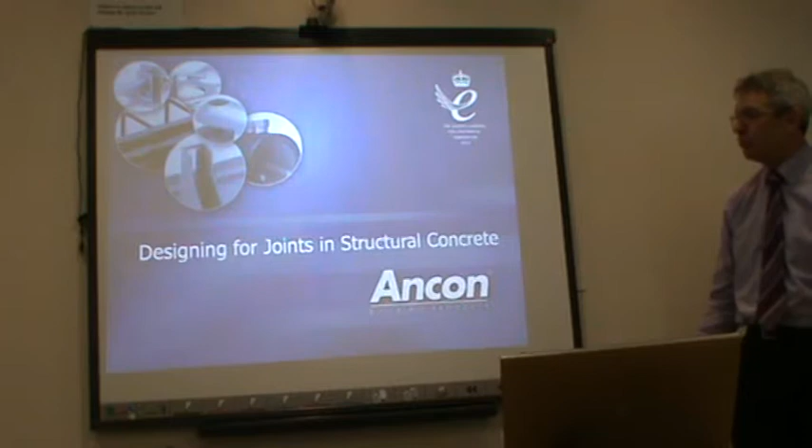We're going to look at reinforcement continuity systems, starter bar systems and bar couplers, shear transfer mechanisms - basically dowels and shear transfer mechanisms, thermally broken connections and shock connectors, that sort of thing, and punching shear reinforcement. Those are the 4 areas we're going to look at. It's not all focused on the products.

Let's start with bog standard construction joints, because we do this in different types of joints. Construction joints - everybody's poured enough concrete for the day, they've gone home, they're going to come back the next day and pour more. What you usually do if you're casting a slab or a column vertically, you leave some bars sticking out the top of the concrete, come back the next day, overlap some more bars, and pour more concrete.

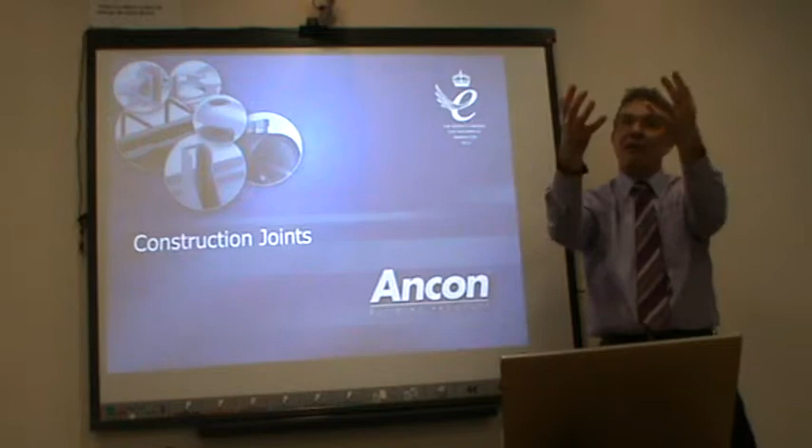If you're fixing walls to slabs, or walls to walls, you can't have bars sticking out into fresh air. What you've got to do is drill loads of holes in the formwork, have bars sticking out, then thread all the formwork off the bars - and the bars always stick out into places where people want to be working.

So other systems have been developed so you don't have projecting bars from walls. The most common system used is a continuity strip. Ours is called Eazistrip, with a Z in it. Everybody does continuity strips - Halfen do one called Kwikastrip, with a K and a W at the beginning. It's not top end of the market, just cheap and cheerful stuff.

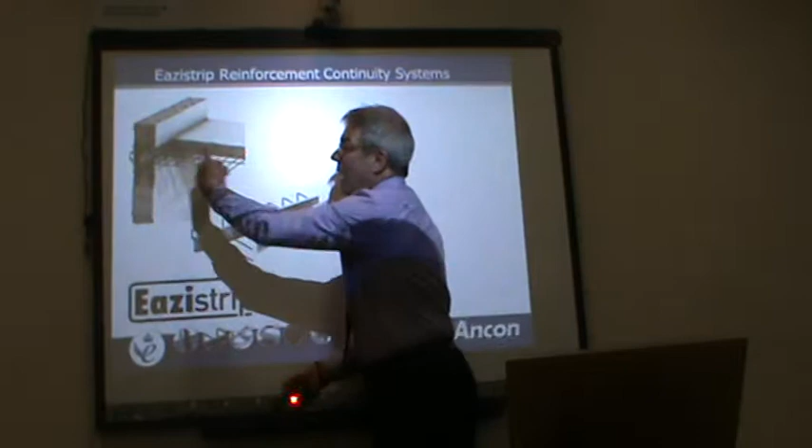An Eazistrip system is starter bars in a box. Rather than having bars projecting out through the formwork, you have a box with a lid on it. You fix that back to the structure, nail it to the structure, cast your concrete, take the lid off the box and bend the bars out as and when you need them.

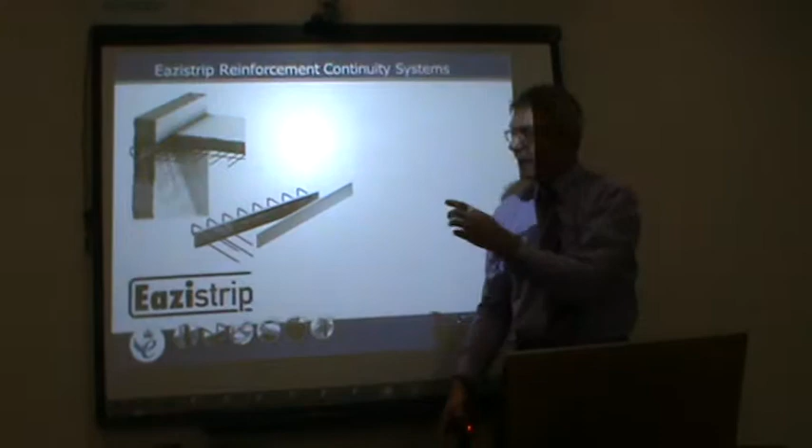This has got CARES approval and BBA certification, and it works great for small diameter bars. When bars are 10 and 12 millimetres thick, they're easy to bend into the box and easy to bend back out. We use special reinforcing bar so you don't get any loss of ductility or brittle failure in the bars when you bend them twice.

It's fine for small bars, but big bars you can't bend - you can't fit any in the box because the lap length required when you bend the bars out is too great. And even if you could, you couldn't physically bend them. A 20mm bar, you'd need lots of big blokes with big scaffold poles and big muscles, and everybody's going to give themselves a hernia bending pieces of reinforcing bar.

So for larger diameter bars, other systems are used. That's how the Eazistrip works.

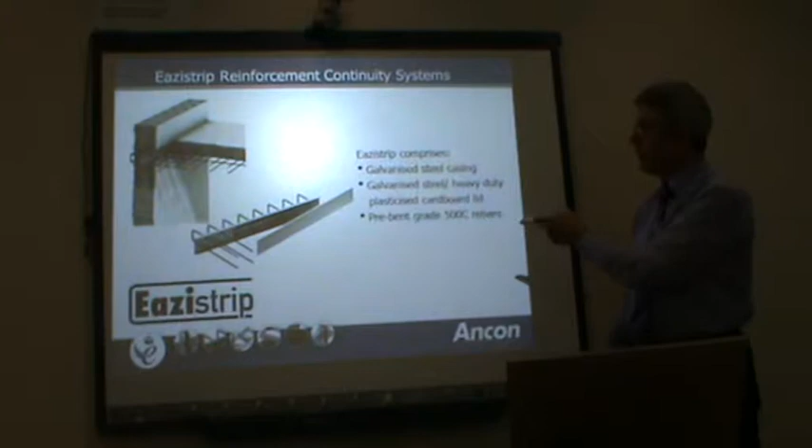What we use for larger diameter bars are either starter bar systems or our KSN anchor system. They're both basically a means of anchoring a casting socket into concrete. Rather than having bars that you bend out, you thread a bar into a casting socket. A starter bar system is basically a reinforcing bar coupler with a bar screwed into the back of it, cast into one concrete element.

The nailing plate is just to fix the coupler to the shuttering. You strike the formwork once the concrete has cured, and simply screw in another bar from that point onwards and take it away from there.

That's fine, except that in a wall - if you're fixing a slab to a wall as I showed in the last slide, and it's only say 200mm of concrete - by the time you get a coupler in, and the bar is providing the anchorage for the coupler, the bar has to come out straight for 4 diameters, then bend down. Unless the wall is quite thick, you'll end up with a bar that's either too close to the face of the concrete, or even sticking out the back of the wall.

Even better than that type of system, which is available for all bar diameters, is our KSN anchor system, where rather than having a casting socket like that, we have a casting socket that looks like this. The anchorage is achieved by the flattened end on the forged stud, which anchors it into the concrete to resist pull-out.

The bars are simply screwed into that, and these are installed on a timber carrier. You push a piece of timber, nail it to the formwork with these attached. After the concrete's been struck, you take out the timber and screw the bars into the casting sockets at the bottom of the recess.

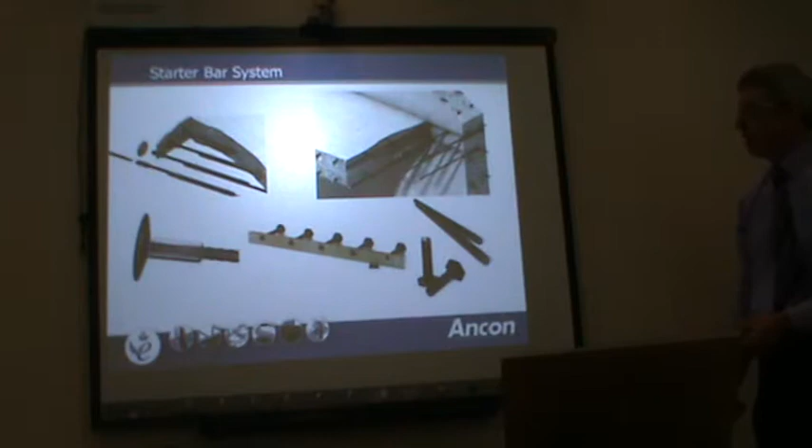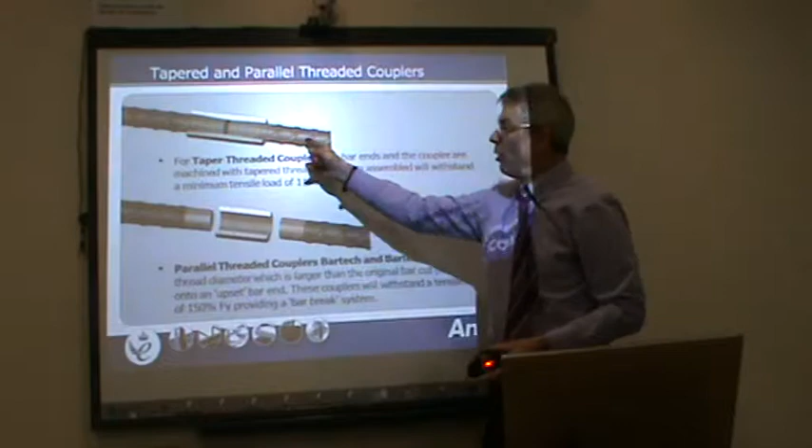Couplers, they're both sort of couplers of a kind, I suppose, and the starter bar system uses the conventional taper-threaded coupler. Taper-threaded couplers are the industry standard, a means of connecting two reinforcing bars together without having to overlap them. The starter bar system is one use, where you thread one bar into the coupler at a concrete joint, and another bar at the other side.

Taper-threaded couplers are the cheapest couplers that we manufacture, the cheapest available really. They have advantages over parallel threaded couplers in that, because the thread gets smaller as it goes in, when you're pushing the bars in and winding them with a torque wrench, you're effectively pushing the bar into a space too small for it. What happens is this coupler ends up clamping the bar. So not only do you get the full pull-out strength required, but you can also achieve the slip resistance.

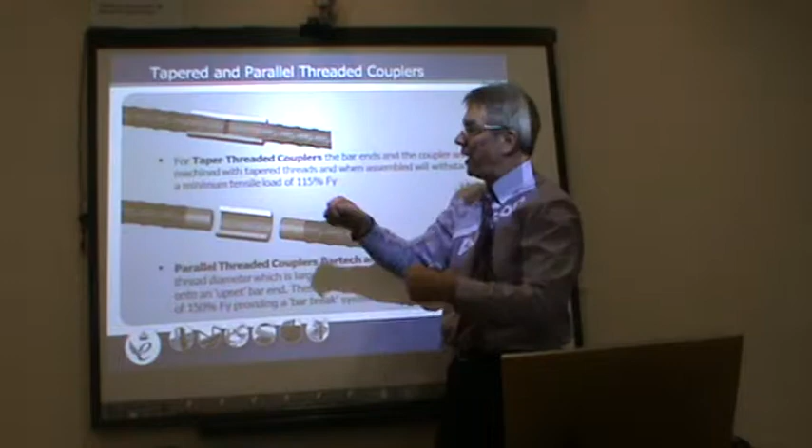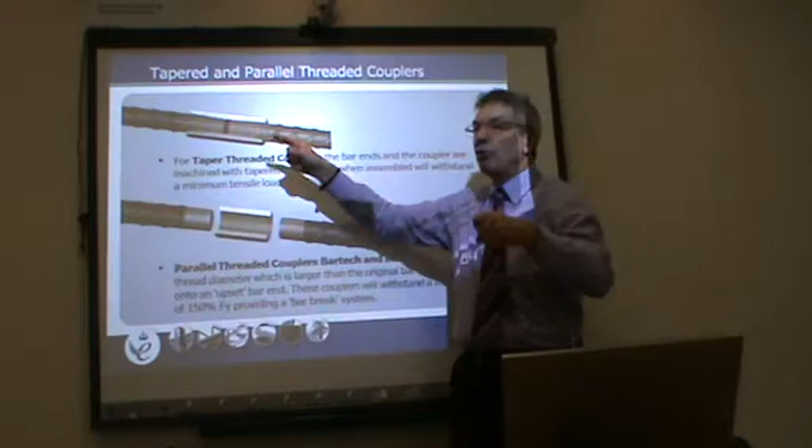What we've got to achieve is, when we test these in a machine after developing the coupler, we've got to put it in a pull testing machine and pull it until the bar pulls out of the coupler. That hasn't got to happen until we've exceeded the yield strength of the bar by 15%, so we're getting 115% of yield, which we can achieve with either coupler. But with all couplers, we've also got to achieve a slip resistance, and under full load, the bar hasn't got to move in the coupler more than 0.1 of a millimetre.

It seems ridiculous to me, it's making reinforced concrete construction into Swiss watch technology, but 0.1 of a millimetre is what the bar is allowed to move, and that's more easily achieved with a taper-threaded coupler because of its clamping action.

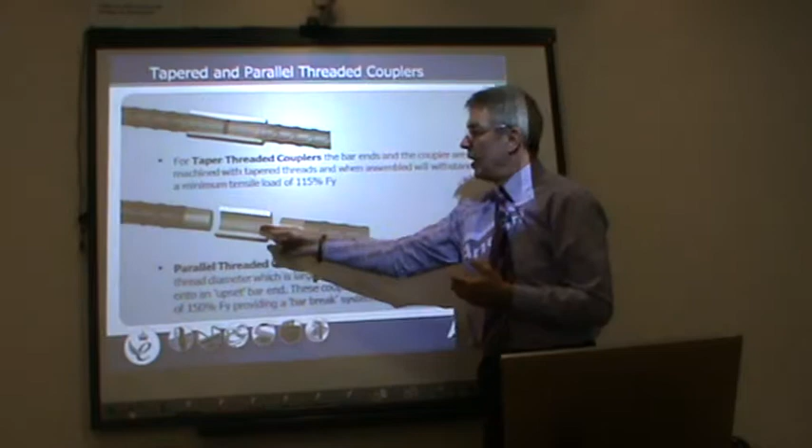The bar is actually forcing the coupler, and the coupler is clamping the bar. Parallel threaded couplers, because they wouldn't work in the same way, need to have something special about them to make them worth doing. What we do is cold forge the end of the bar before we put the thread on it.

Cold forging the end of the bar basically means we hit it with a big hammer. If you've ever hit your thumb with a big hammer putting a shelf up at home, you'll find your thumb gets a lot bigger, and reinforcing bar is no different. So you whack it with a big hammer, the end gets fatter, then you put the thread onto the fat end of the bar, and the thread ends up a bigger diameter than the bar originally was. So this coupling becomes the strongest point along the length of the bar.

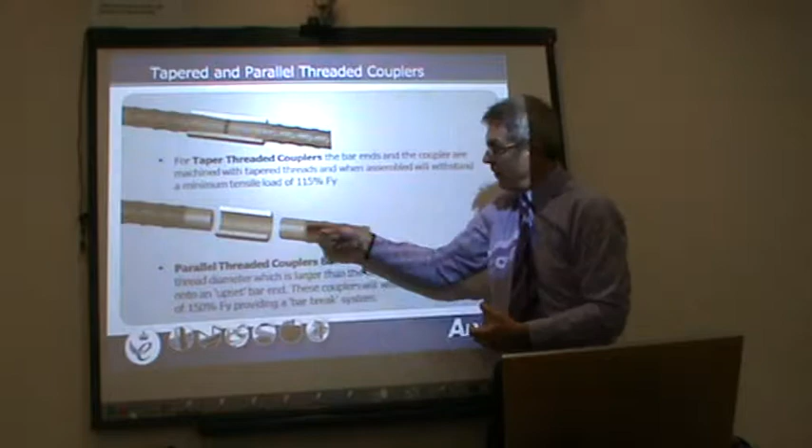Rather than the bar pulling out of the coupler in a test, the bar will actually break to one side of the coupler. This meant that traditionally these couplers were used in earthquake zones abroad, where you could not really guarantee what sort of loads you were going to get. You didn't want lots of bars pulling out of couplers. You'd put these in and know you were putting no weakness whatsoever into your structure.

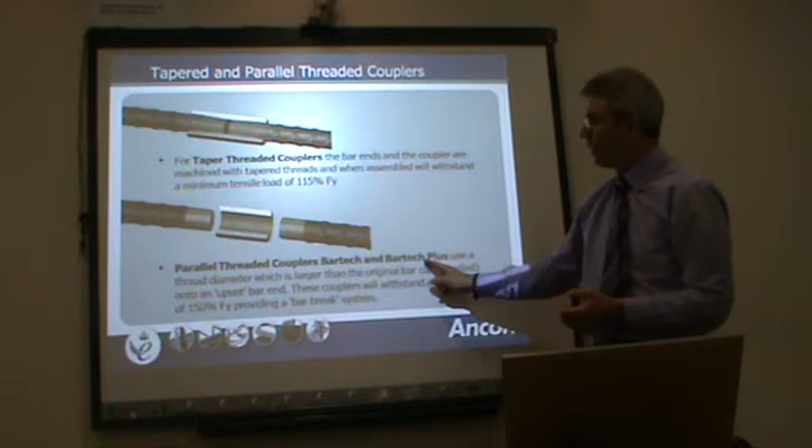Nowadays, though, we also do them as what we call our Bartec Plus system, where rather than cut the thread onto the end of the bar with a cutting machine, we roll the thread onto the end of the bar. A rolled thread gives much better resistance to fatigue loading, which makes our Bartec Plus coupler suitable for roads and bridges applications where you're getting cyclic loading. Bartec Plus actually has Highways Agency approval in the UK, so you can use it in roads and bridges applications—one of the very few couplers you're able to do that with.

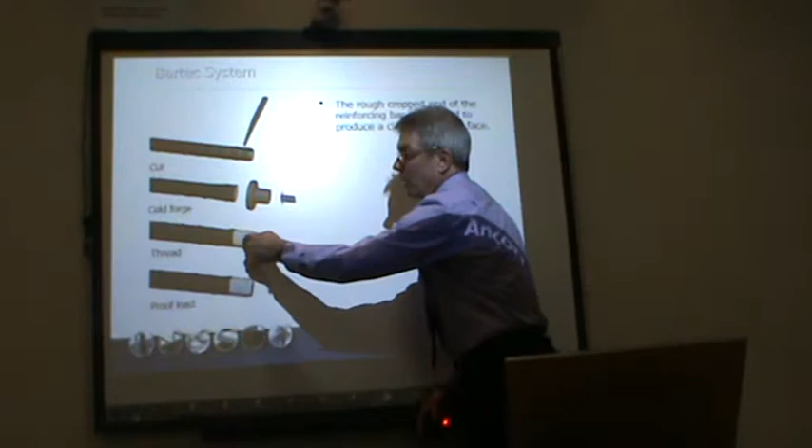I think the next slide might just show you the cold forging thing. Whacking with a big hammer, put the thread on, and there you end up with an M24 thread on a 20 diameter bar, so you're actually increasing the strength of the bar locally to compensate for the threading.

Whatever system you use, you need to put a thread onto the end of the reinforcing bar. In the old days, we would send out threading machines to everybody who bought any of our couplers, irrespective of the size of the job. So somebody wanting 6 couplers would get 6 couplers in a jiffy bag and a threading machine on the back of a lorry. We don't do that anymore.

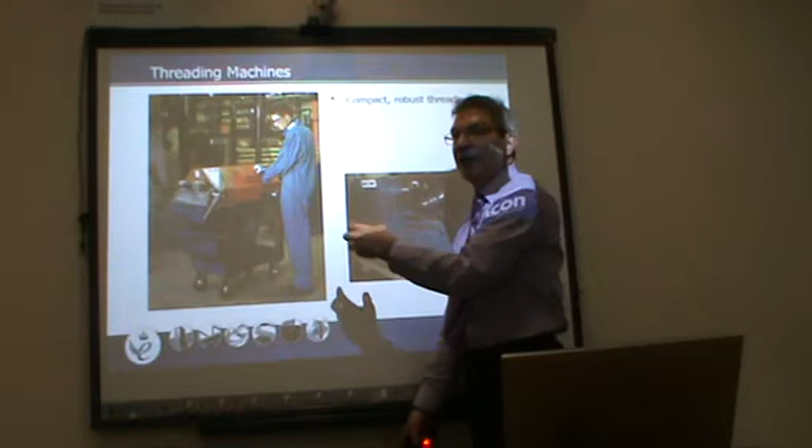We keep the threading machines in the rebar yards. So you simply have to order up your reinforcing bar, ready threaded. The engineer will do that anyway—he'll schedule his reinforcing bar with the threads on it, and it will come along already threaded.

The threading machine for the taper thread looks like that. The threading machine that upsets the end of the bar and then puts the thread on looks like this—it's a much more expensive piece of kit. As I say, these were very, very rare; there was only one threading machine like this in the UK. We're now taking the threading in-house for our Bartec Plus, so we'll have control of the threading and we'll sell it as an Ancon product.

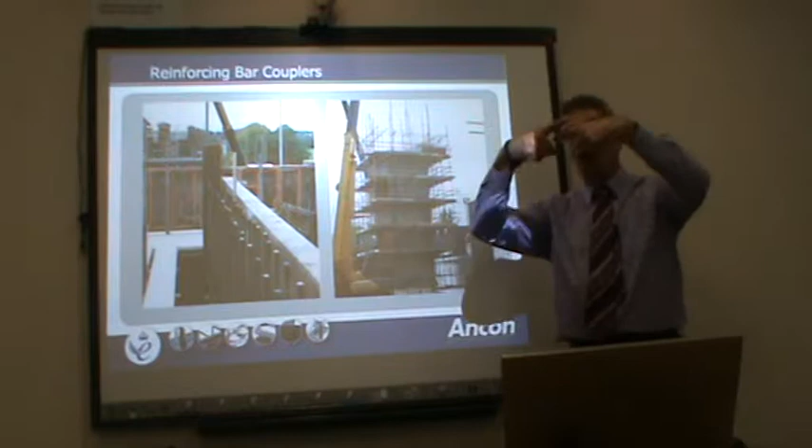Now, couplers are generally not an economic alternative to overlapping reinforcing bar. Generally, if you just overlap two reinforcing bars, it's a more economical way than putting threads on the end and screwing two bars together.

But there are instances where coupling reinforcing bar is necessary. You've got to couple 50 diameter bars—the European standard says 40 and 50 millimetre bars have got to be coupled. You can't just overlap them; there really isn't room to overlap them, I suppose. If you've got very dense reinforcement and you overlap all your reinforcement, doubling up the area, you can exceed your maximum reinforcement ratio.

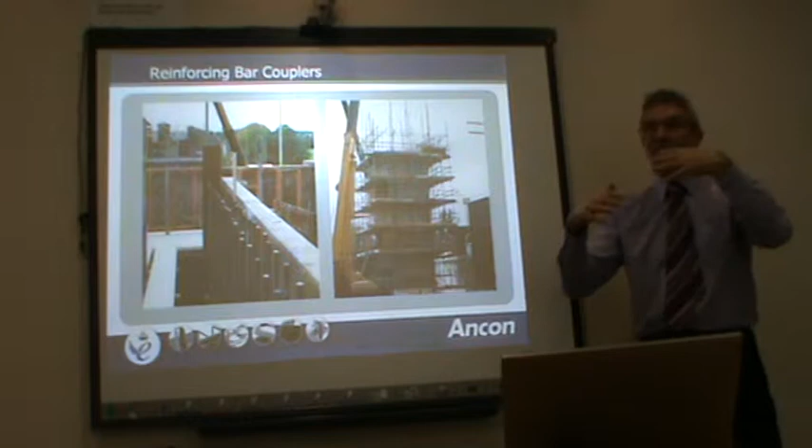And when you've got poor quality concrete, lap lengths have to increase. So sometimes on large diameter bars, a lap length can be 3 metres. In that instance, getting rid of a load of bar and substituting a coupler can be an economic advantage. This is an even better example.

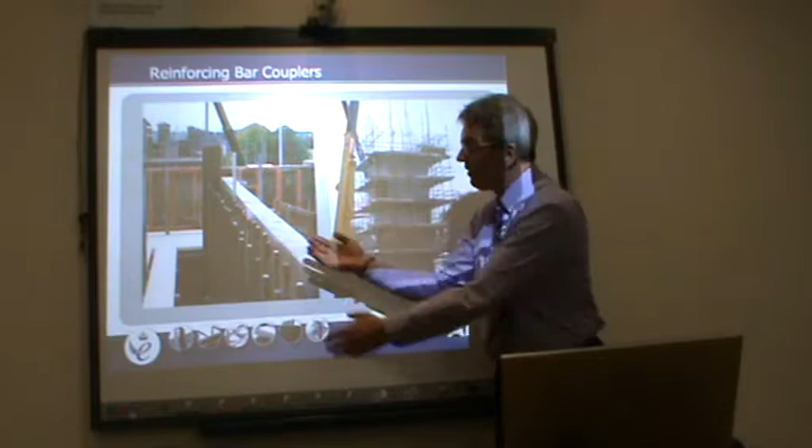If you cast in a lift shaft, using couplers, even where it looks like you might not need them, can be very, very cost advantageous. Here we've got small diameter bars, but wide spacings, with a vertical joint. There's no reason really not to just stick the bars out the top of the concrete and lap some more reinforcing bars onto them. But if you do that, you may need to use an extra pour of concrete, which can be quite expensive.

Because if you get your reinforcing bar, which comes in a maximum of 12 metre lengths, and you need to leave a metre of the bar sticking out the top of the concrete to lap your next reinforcing bar onto it, you can only pour 11 metres of concrete in one go. In a 60 metre lift shaft, that means 5 pours at 11 metres and another pour at the very top of your building of 5 metres of concrete.

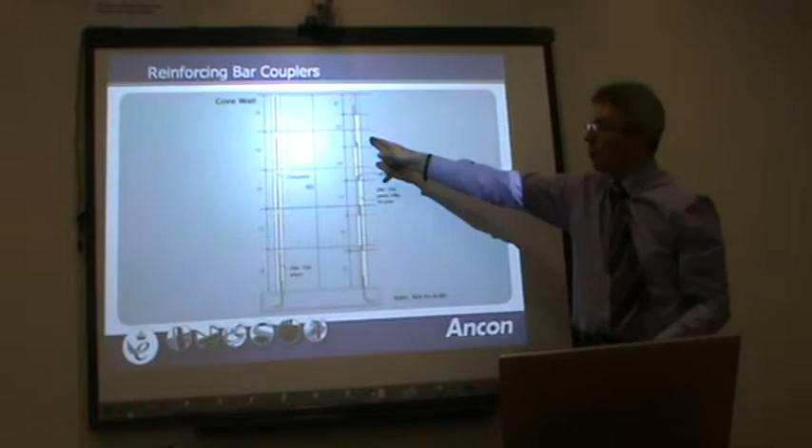If you put a coupler on the end of the reinforcing bar, you can pour 12 metres of concrete in one go, right up to the very top of the coupler, screw the next bar in, and you get 5 pours of concrete instead of 6 pours to create a lift shaft. This saves a lot of time and effort on site, and the couplers more than pay for themselves for that sort of application.

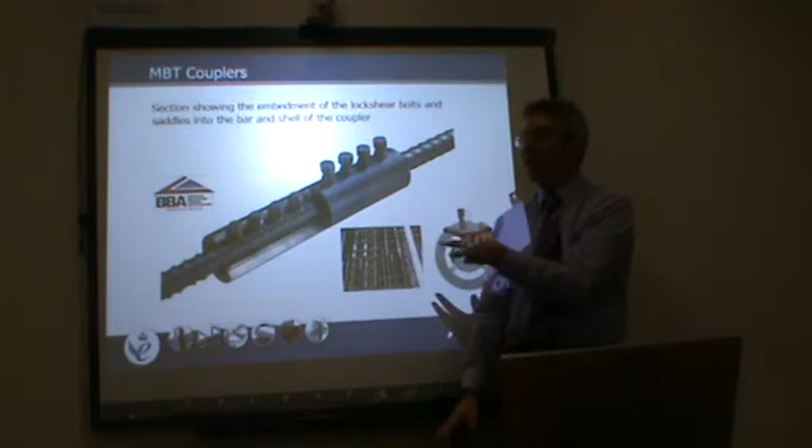One coupler, actually two couplers, don't need any threading. I say two because the patent on our MBT coupler expired a couple of years ago, and it's been copied now by a company called Lenton, who produce something called Lenton Lock, which is the same thing really.

Our MBT coupler doesn't need you to put a thread on the end of the reinforcing bar. It's simply a clamp. You clamp the bars in a tube by pushing them down onto serrated steel saddles in the bottom of the tube. A serrated steel saddle is a strip of steel with teeth machined onto two sides.

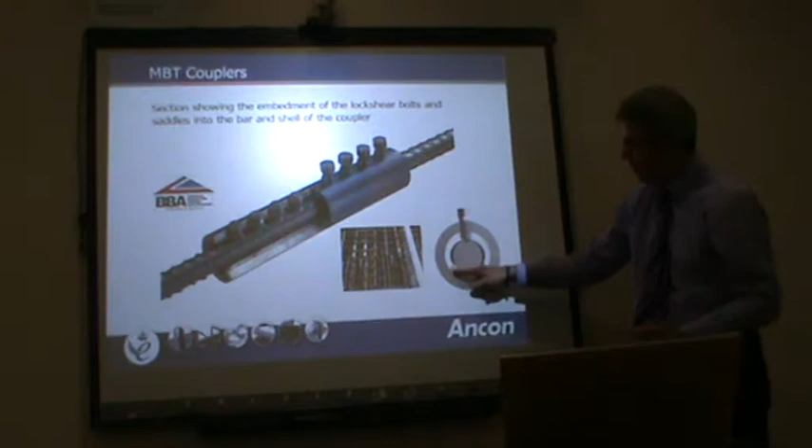We sit those in the bottom of the coupler, tack weld them into position at each end, and then push the bar down onto them using pointed, hardened bolts that go through tapped holes in the top of the coupler. All you do to create a full strength splice between two reinforcing bars is push...

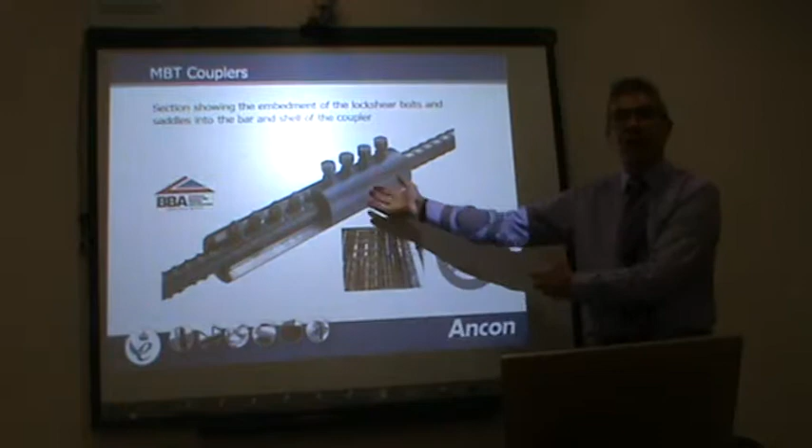the bars in from the ends, make sure the bar's sitting on the saddles at the bottom, and then start tightening these bolts up. You don't need to work to a torque, you just keep tightening, keep tightening, keep tightening, and eventually, when you reach a predetermined torque, the bolts will just shear off. Once you've sheared off all the bolts along the length of the coupler, you've got the full strength splice, but you didn't have to put a thread on the end of the reinforcing bar.

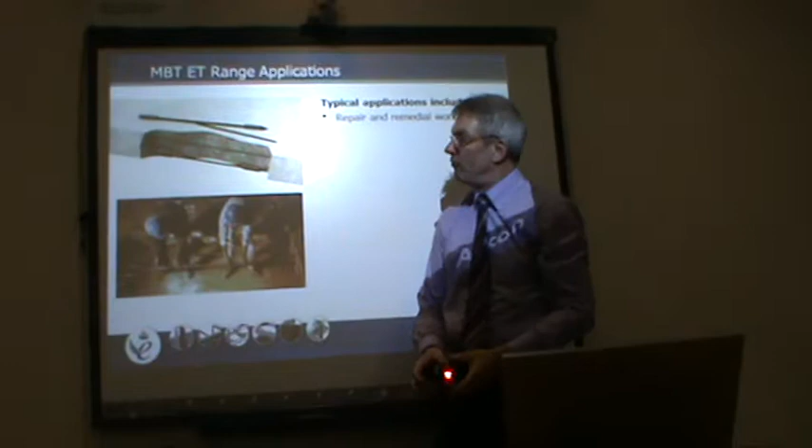Which is fantastic when you're already at site and the bars are already there and you can't possibly get in and put a thread on. So when you're patching up holes through a building where you've had a tower crane, or you're replacing spalled concrete due to corroded reinforcing bar, you can simply break out a lump of concrete, cut off the corroded reinforcing bar.

Rather than having to break out a full lap length at each end to lap a new piece of bar onto, you can break out a very, very short length, half the length of a coupler, slide two couplers onto a piece of bar, offer the bar up, slide the couplers over the joint, shear the studs off, job's done.

Patching up holes like the tower cranes, if you cut in slabs to put new drains in, you can reinstate the reinforcement using MBT couplers. Any sort of situation like that.

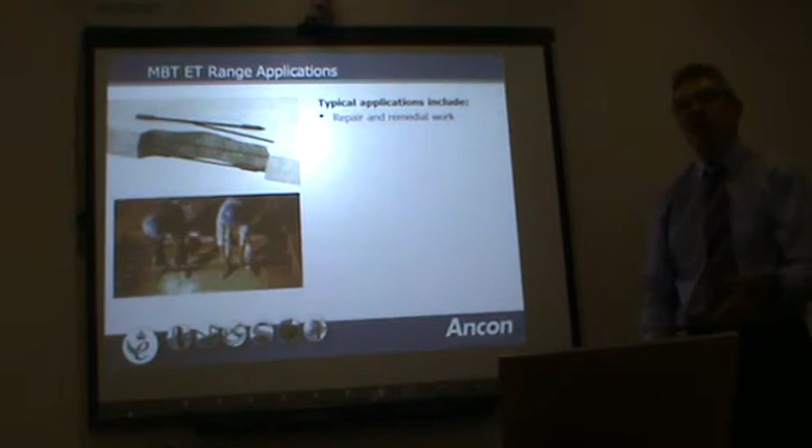If someone has cast a pile cap too high, and there's only a short bar sticking out the top of the pile cap and you need to lap onto it, you can jackhammer out a load of concrete, or you can drop an MBT coupler on the top and splice it that way.

So it's very, very cost effective in those instances. It's not the cheapest coupler in the world, it's not the smallest coupler in the world, but usually it's a good way of putting something right at site that's gone wrong, and it's usually a cheaper way of doing it than the other alternatives.

Now when we've got movement joints - and we're rattling through these now at a rate of knots - we've got a movement joint in a piece of concrete, which you'll have if your concrete is very, very long. Brickwork needs a movement joint every 12 metres or so, concrete needs one every 60 metres or so, just to allow the concrete to expand, contract, creep, shrink and move.

If you've got a movement joint in a piece of concrete, you're not going to run a reinforcing bar through it, because that wouldn't be an effective complete break in the concrete. You need a complete break and treat it as separate slabs side by side, which are allowed to expand and contract.

Because you've got no reinforcement going through the joint, you'll never want to transfer a bending moment across it, so it'll always be a sort of hinge in your slab. But you might want to transfer some shear from one side to the other, so that the load from something standing on this side of the slab can be transferred onto the other side, so you don't get differential movement.

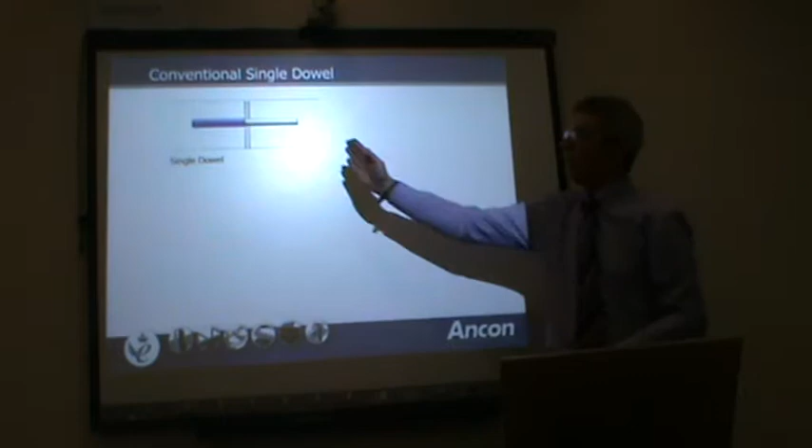Traditionally, to transfer shear loads across a movement joint, you use a debonded dowel bar. You put a stop-end formwork on your slab, drill lots of holes through, push a dowel bar through so it's half on each side, and debond one side, pretty much like a debonded wall tie. The concrete can then expand and contract, the joint opens and closes, and the load will be transferred to that side through the steel bars.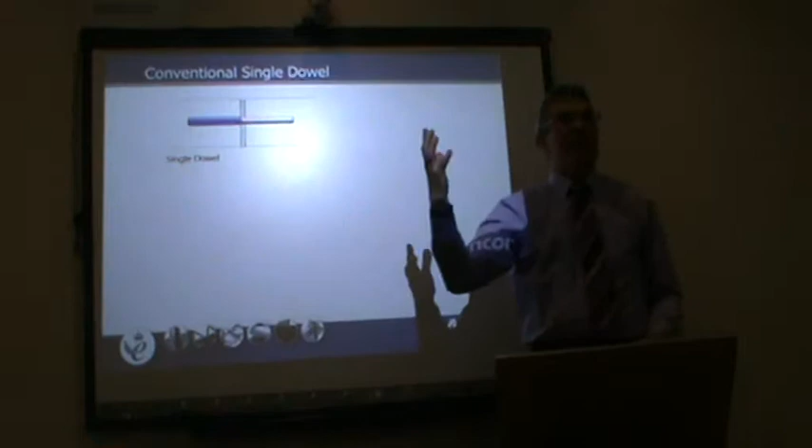The difficulty with these is that they're a very poor way of transferring load from one side to the other. All the weight gets put onto these fingers of steel which press down on the concrete, causing it to crack at relatively low loads. So they're a poor means of transferring load.

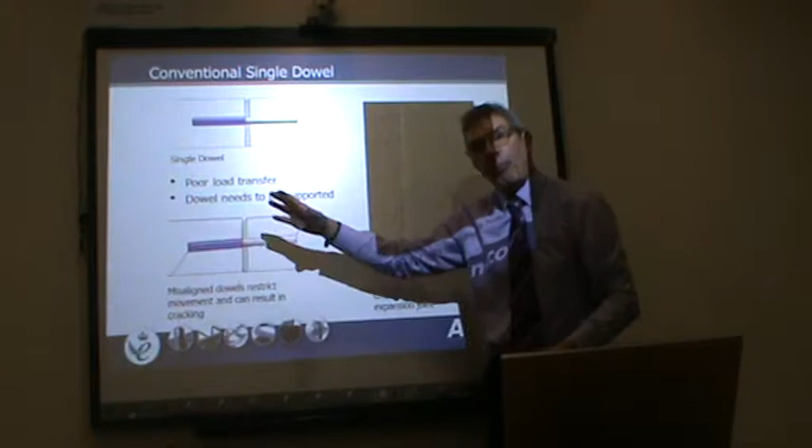And you've got to support the dowels. If you don't support them, you'll end up with massive cracks in the concrete caused by the movement joint that you only put in so you wouldn't get a massive crack. If the dowels aren't supported correctly as the concrete's placed, they get knocked about and point in different directions, the joint is effectively stitched together, and as the concrete tries to move you get tension cracks at the thin points at the end of the dowels, and you get a big crack. This is Reading water treatment works, a real live job.

You basically have to dig it all out and reinstate the joint again to get this to work, and that's purely because they didn't support the dowels. They just balanced them on a bit of plywood and hoped they wouldn't move about as they placed the concrete.

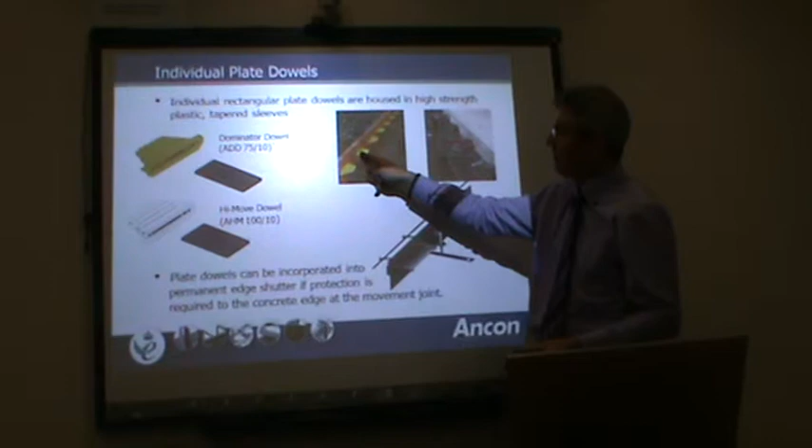Happily, all of those difficulties can be overcome very easily. First, you need to use a dowel with a sleeve. Rather than balancing the dowel across the joint, you fix a sleeve to the formwork on your first concrete element, cast that concrete, strip the formwork, push the dowel into the sleeve, and then cast the concrete on the other side. That ensures the dowels all point in the right direction, so you don't get cracking as the concrete moves backwards and forwards.

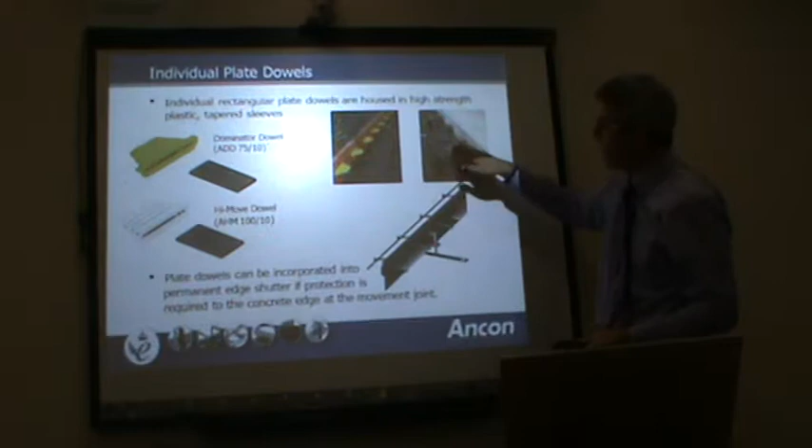Using a plate rather than a round dowel spreads the load over a greater area of concrete and means you can get more load out of it before the concrete starts to crack underneath the dowel.

We can incorporate an edge trim into this. We have a system called multi-joint where we actually have an edge trim to strengthen the edge of the concrete as well as transfer the shear across. That's used generally in high bay warehouses with lots of heavy plant running about, like forklift trucks, which grind off the concrete at the corner, and when fines and aggregate start dropping into the movement joint it doesn't work anymore. So if you reinforce the edge using the multi-joint system, which incorporates the dowels, you overcome two potential difficulties with one hit.

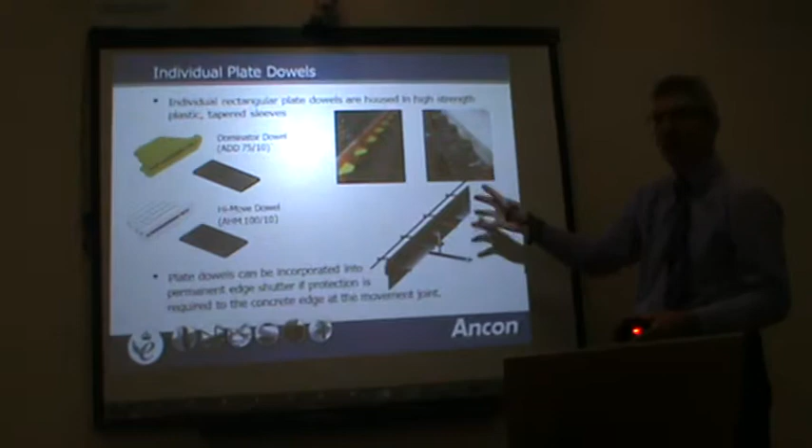Now, plate dowels are okay, you get a bit more load out of them. If you want a step change in the load that you can transfer across a movement joint, you need to look at using a shear connector. Loads of people do shear connectors, and we do them as well, called DSDs.

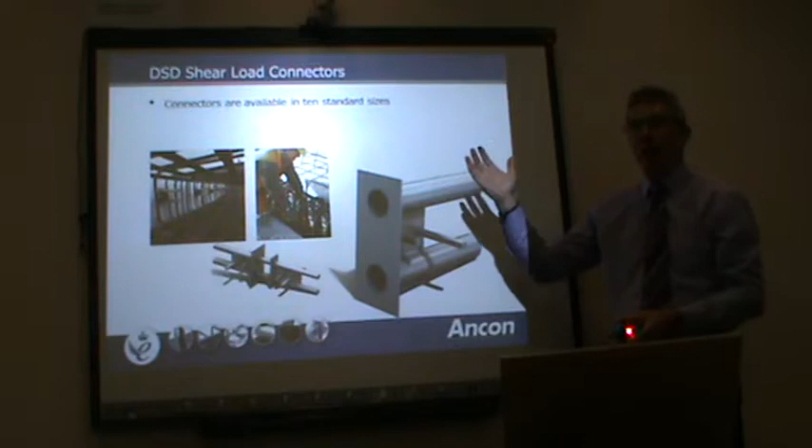In an ideal world that would mean double stainless dowel, because we've effectively got two stainless steel dowel bars, one above the other. We link them together over half the length with a web plate and put a couple of crossbars in, so that part is anchored in the concrete on one side of the joint. On the other side we have two stainless steel tubes, again with a web plate linking them together and some crossbars, so that's anchored in the concrete on the other side of the joint.

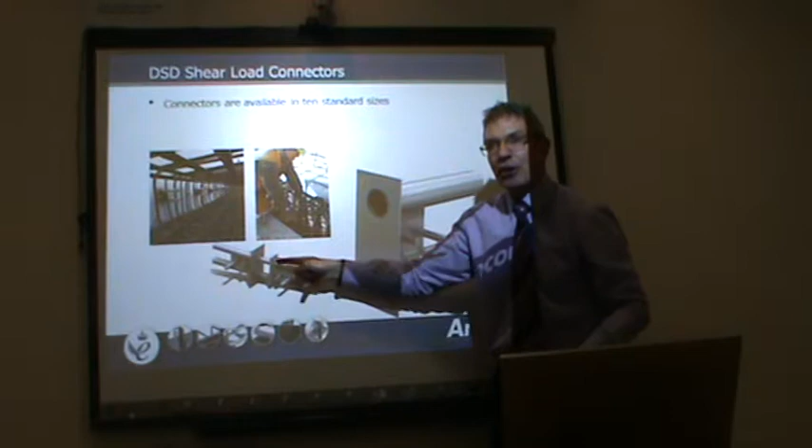You cast the sleeve into one concrete element, push the dowels in, cast the next concrete element, and the joint opens and closes as the concrete moves. This transfers a significantly greater load across the joint than a plate dowel or round dowel would.

There are 10 standard sizes available. The capacities for the littlest ones, which are generally the ones I carry around with me for seminars - I've got nothing today because I came on Ryanair, you're lucky I'm not sitting here in my socks and underpants - will carry 2 tons each across a standard 30mm movement joint. The very biggest ones, which I don't carry around for seminars, will carry 95 tons across movement joints up to 60mm wide, and these are the size of the chairs you sat on.

Huge pieces of kit. The little ones aren't so bad to carry around, but the lads in the office would argue I'm stupid enough to carry the big ones around too, based on the fact that 16 years ago, when I moved from the northeast coast of England, God's country, down to Sheffield to work in the technical department, I maintained a season ticket.

We were talking about football earlier. I maintained a season ticket, not at Manchester United, not at Liverpool, at Hartlepool United. So now I live 250 miles from home, and every other week, because I've got a season ticket, I've got to do a 500-mile round trip to see us getting beat 1-0 at home by Burton Albion or some team with no hopers like that.

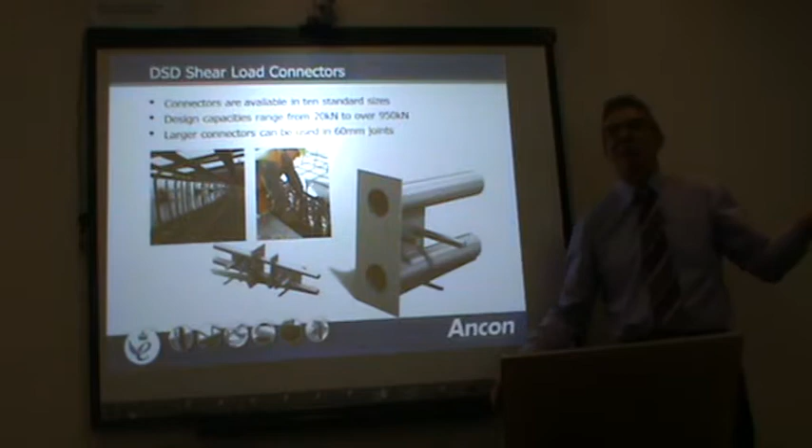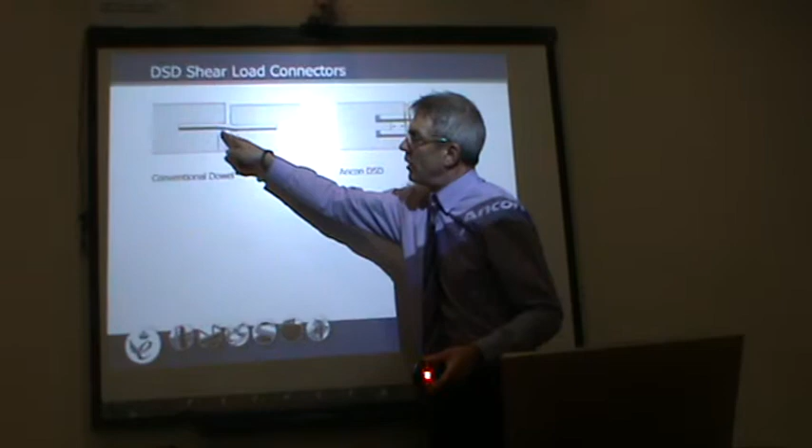But I'm still not stupid enough to carry these around with me for seminars. The reason these carry a lot more load than a single dowel is that, bizarrely, what gets a dowel connection failing is the failure of the concrete underneath the dowel, where all the load goes into the concrete. That stress in the concrete is a function of the stiffness of the dowel. The stiffer the dowel, the more load you'll get out of the connection.

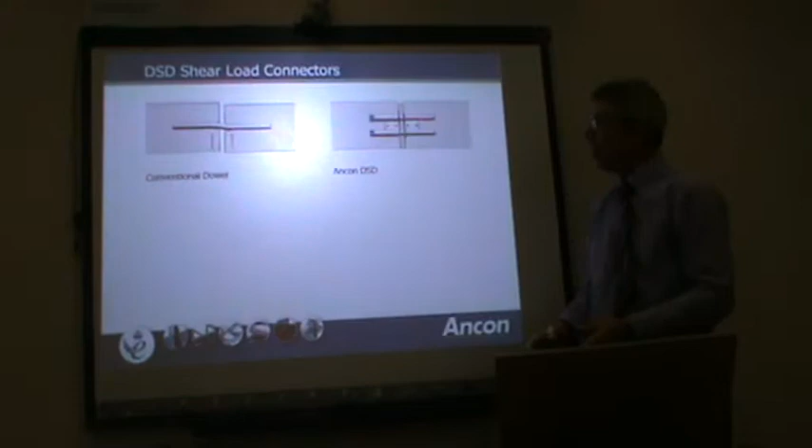And you can make the dowel stiffer - it makes sense - by making it bigger. So a large diameter bar will carry more load than a small diameter bar. But there comes a point where that runs out of steam. If you turn a simple round bar into what is effectively a steel beam, like an RSJ, with two circular flanges and a web, that's about 6 times as stiff, and you'll get 6 times the load out of it. We reckon a single DSD 130, which has two 30mm diameter dowels, will carry the same as 6 individual 32mm diameter dowels.

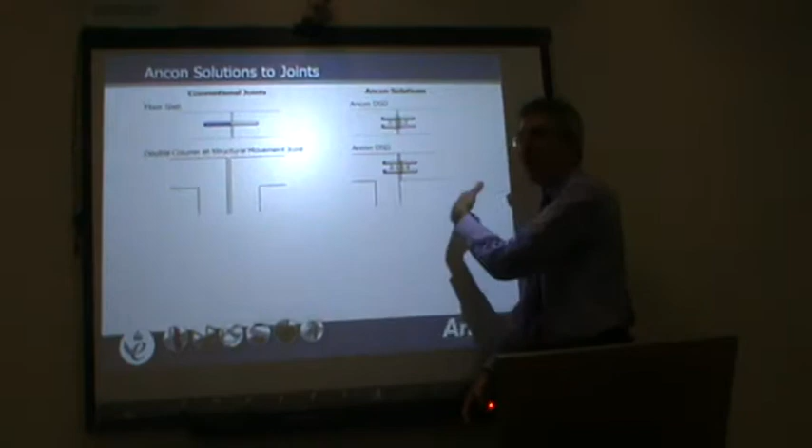So these things can be very, very cost effective, and they're used for high load situations - situations where traditionally you might drop two rows of columns in a movement joint in a structure. You can get rid of a row of columns, cast a sleeve into one drop beam above one column, cast a slab onto the projecting dowels. You've got the movement joint, but you've got rid of a complete row of beams and columns.

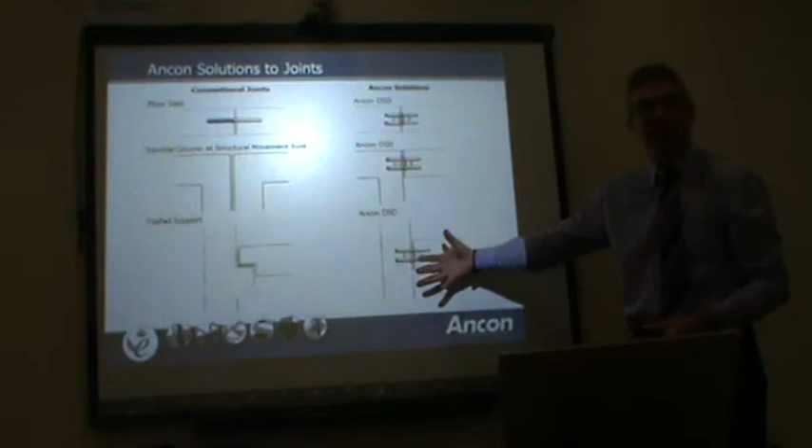You can also get rid of the need for horrible corbels. If you're connecting a slab to a wall and you've not got a moment, not using the continuity systems I talked about, usually you'll make a shelf on the wall just to sit the slab onto. But they're horrible to design, horrible to construct. Cast a sleeve into the wall, push two dowels in, cast the slab onto that, and you've got the same situation, but much more simple and quick to achieve on site.

If you've got movement in two directions, which you will get whenever slabs aren't balanced - imagine these slabs expanding about the centre line - you've got concrete moving in opposite directions over that part of the joint. So the joint is opening and closing, but you've also got sliding side by side at that point. You can accommodate that by having an over-wide sleeve, wider than the dowel, so the dowel can move sideways as well as in and out of the sleeve.

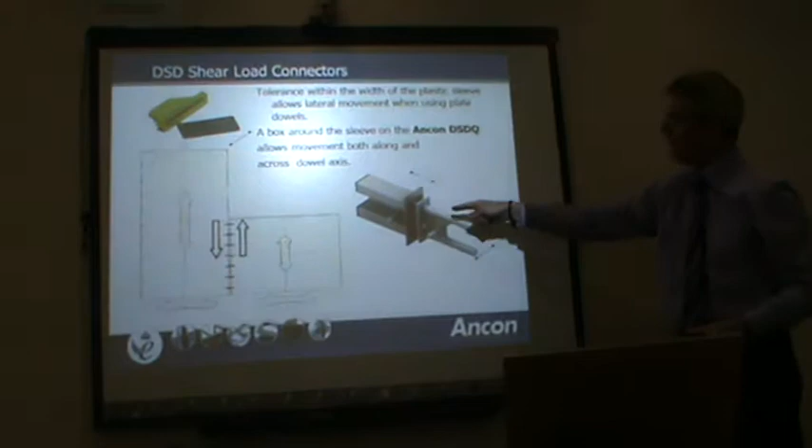With the DSD, we weld the circular sleeve in the centre of a box, just a little tack weld each end. The dowels go in centrally, and the forces in that direction break the little tack welds and allow the dowels to move sideways within the box as well as in and out.

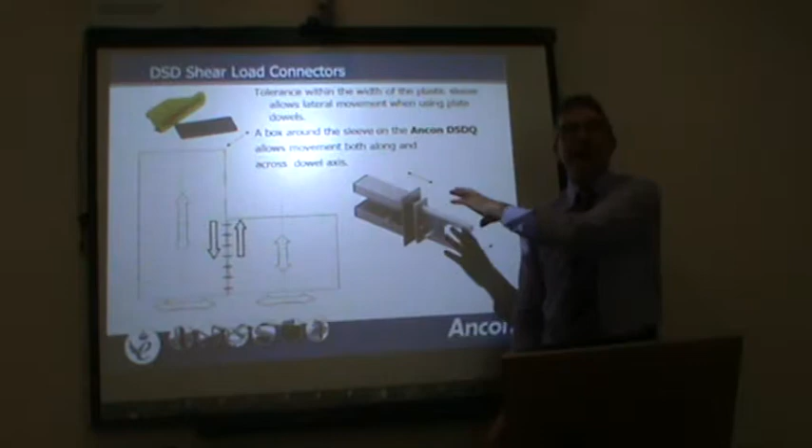DSD-Q, by the way, doesn't mean double stainless dowel, because nobody would work out what the Q stood for. It's actually something in German - it's a Swiss invention. You've probably been sat there thinking this bloke's really boring, how can I pass the time? I know, I'll see how many Swiss inventions I can think of. I bet you came up with the cuckoo clock and the Toblerone. Well, next boring CPD seminar, you've got another one, the DSD. This was invented by an engineer in Switzerland who has the perfect engineering job - he sails on Lake Lucerne all summer in his little yacht, skis at Davos all winter, and rings us up once a month asking how many of these we've sold, because every time we sell one, he gets a couple of bob. So all you need to do is dream up something like this, get on Dragon's Den, and you're made for the rest of your life.

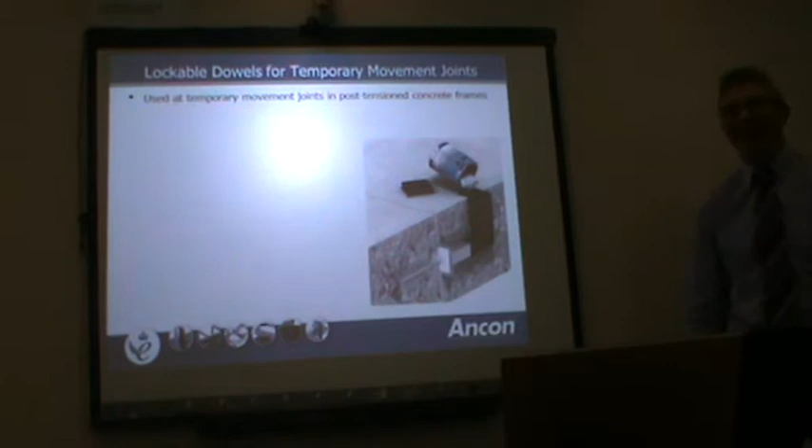Occasionally, the movement joint is only required temporarily. That's generally on post-tension slabs, post-tension buildings, where you need a movement joint not because you've got vast amounts of concrete, but because you've got to take up initial shrinkage. Post-tension slabs shrink dramatically over the first few weeks, and you need to accommodate that movement.

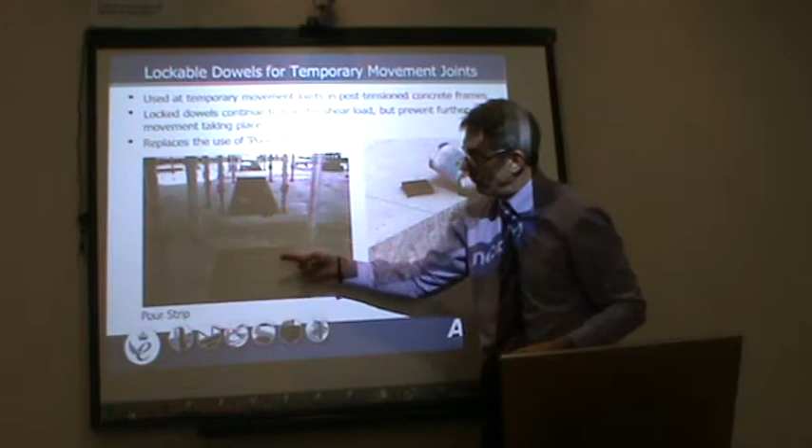What's generally done is you leave a strip of concrete unpoured, with bars overlapping within that pour. The joint opens as the concrete shrinks, and then you come back afterwards and fill this in situ with concrete at some later stage. Nightmare. Much better to use a dowel bar like that, which allows the joint to open up, and then we lock the whole thing together with a high strength resin afterwards.

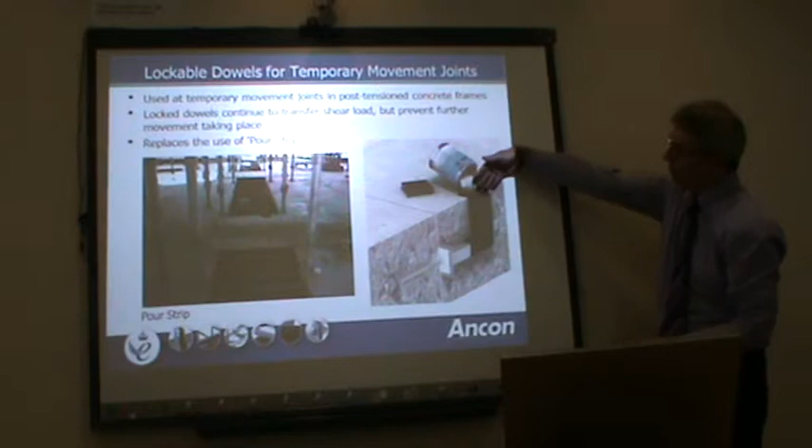What we have here is a single round dowel anchoring the concrete on one side with a nut and washer. On the other end we've got grooves machined into it, and in the DSD-Q type sleeve we have a funnel at the top. When all the concrete has shrunk and the joint has opened up, we simply drop a plate with a notch in it into the top of the sleeve, which nestles onto the grooves on the dowel bar.

Then we fill the whole thing up with resin. The joint is then effectively locked together, and you can transfer 100 kilonewtons of tension through the dowel bars as well as the shear, so you can anchor your floor slabs into the hard points of the stair towers and shear walls, so your building resists sway and doesn't fall over.

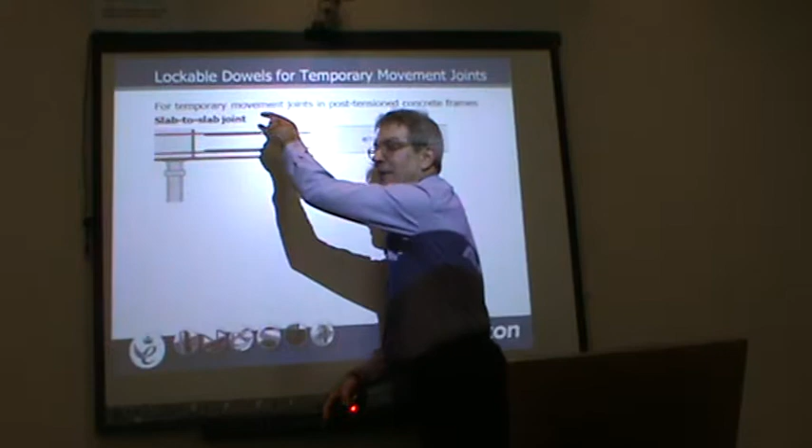Obviously you can do that where you're not expecting bending in the slab. You can't do it this way if you're expecting bending - this won't resist bending, it will only transfer shear. So rather than being put in the middle of a slab, it's generally put hard up against the point where you're attaching your slab to your shear wall or to your concrete stair tower or lift shaft or whatever.

And we do that generally using the KSN anchor that we talked about earlier. This is a large diameter thread with an internal thread, and we simply screw a dowel bar into it. After the initial shrinkage has taken place, we drop the plate in, pour in the grout at the top, and your slabs are still anchored to your stair towers and lift shafts.

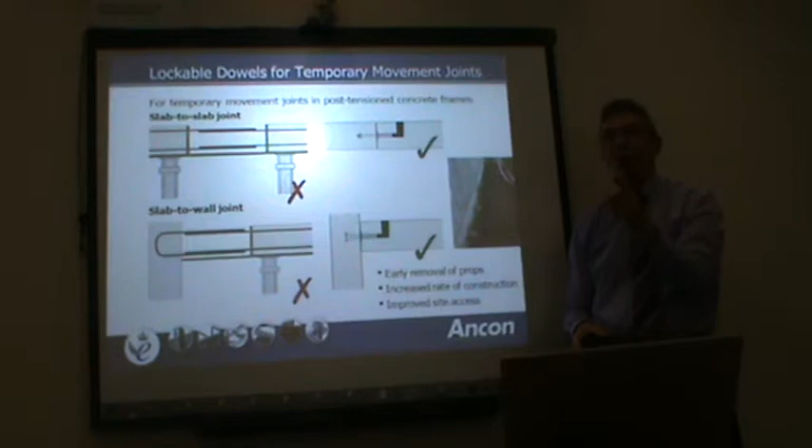The first time this came up for me was in Dublin, actually. We worked with White Young Green, who were down in Dún Laoghaire - I think they might not be now. I used to work for White Young Green a lot of years ago; we were a third division outfit, a bit like my football team. I got called across to White Young Green for the Smithfield development, which you're probably familiar with, somewhere in Dublin.

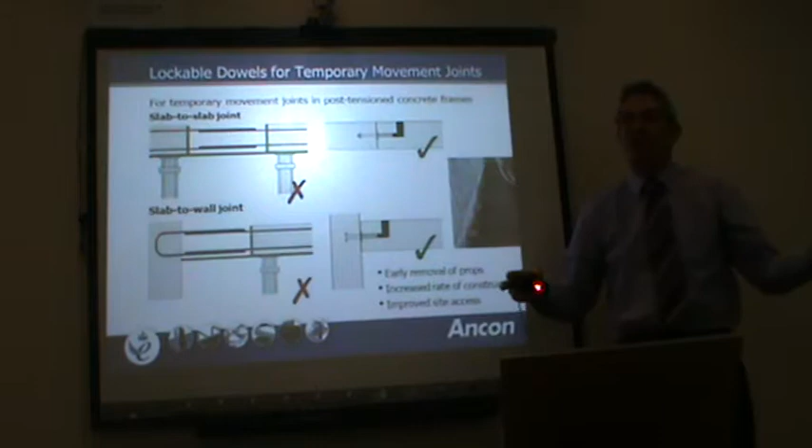For weeks and weeks we designed in DSD shear connectors. At the very last minute, the lads from White Young Green said, so how do these things take the tension across the joint? I said, you can't have tension across a movement joint - the idea is the movement joint opens and closes, you can't transfer tension, it's not a movement joint anymore. What they really wanted, but what we didn't know, was temporary movement and then to be able to lock it up. I don't know what was done in the end on that job, but this is what they really needed - unfortunately it was before the days when we actually had this thing.

If you've got a thermal break in your concrete, you're probably connecting a balcony to a floor slab. You can't just run the floor slab out through the building envelope, because you get a massive cold bridge which keeps the architect awake of an evening. I think it's our duty as engineers and people working for contractors to keep architects happy - that's the main purpose of my life, keeping architects happy.

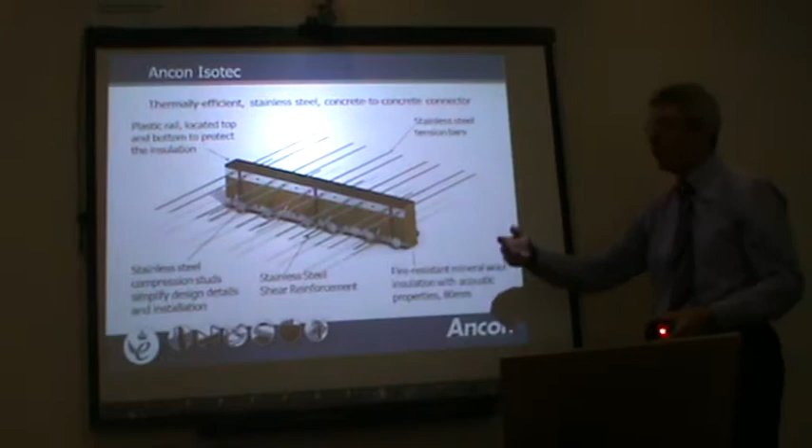So when you've got a concrete balcony attached to a concrete floor slab, you incorporate a block of thermal insulation so you haven't got a massive cold bridge. The most common way is to use a Schöck type, Halfen type, Ancon type balcony connector, which is a block of rock wool insulation encased in a sort of skeleton of steel because it's very unrigid, and it has bars going through it to connect one side to the other.

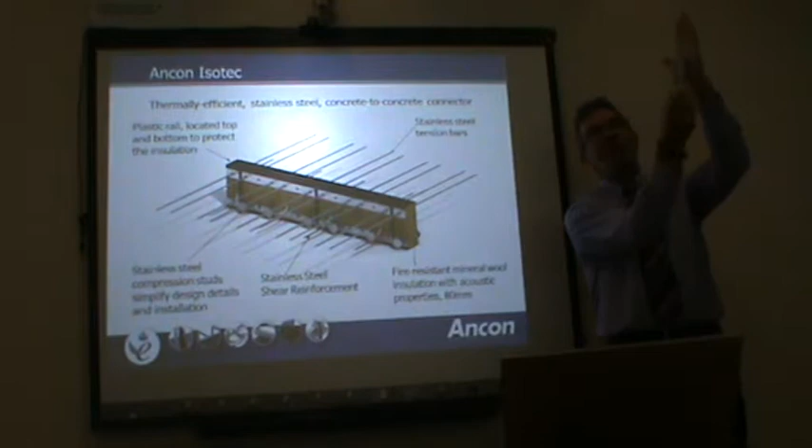Bars going through the top give you three mechanisms. When you're connecting a balcony to a floor slab, there are things that can happen: the balcony can slide vertically straight down the side of the building, or it can simply tip over. So you've got to be able to resist these two methods of failure.

What we have is bars through the top, which pull the balcony back up, and compression studs at the bottom, which push the bottom of the balcony out. So to stop it tipping, you push and pull to keep it level. Then we have bars which come through the top, slope down and come out the bottom, effectively acting as a bit of rope, pulling the balcony back up to stop it from sliding down.

These are very thermally efficient. They're usually 80mm thick, fire protected, and have sound insulation properties, but they're horribly expensive, generally speaking.

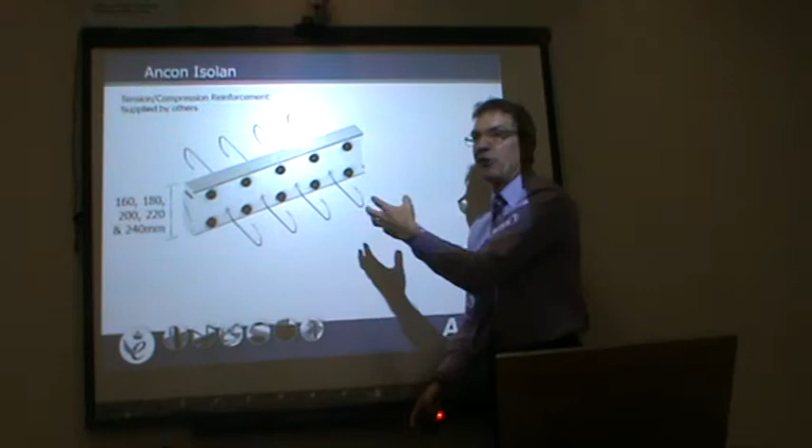So as well as the high-spec type of system, we also have a more cheap and cheerful variation, where we replace the rock wool with CFC-free rigid polystyrene, the sort of thing you get your fridge or TV delivered in, but much denser and more solid.

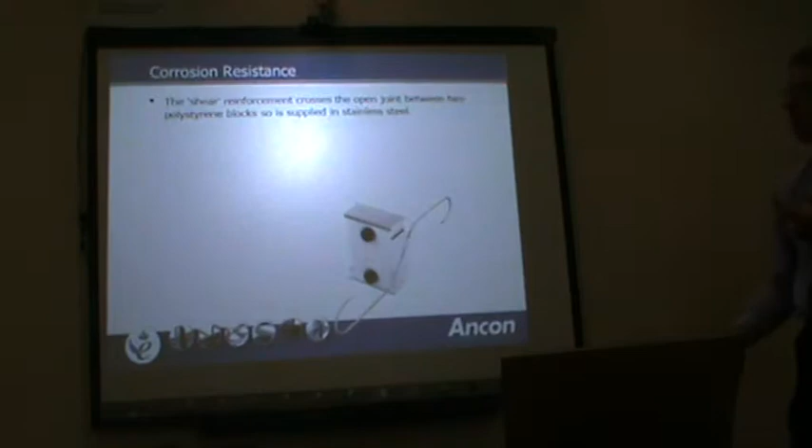We still maintain the stainless steel bars going through the top to stop the balcony sliding down, because they go through an open joint. But rather than having stainless steel bars through the top and a compression stud at the bottom, we just run a tube through the polystyrene. By running the tube through the polystyrene, we can run a carbon steel bar straight through from one side to the other. So you're using bog standard normal reinforcement, which makes it much cheaper.

All you need to do is make sure that when it's installed, they put some bars through the tubes. We have had one instance where they decided not to do that, and luckily we spotted it before the balcony was built. But with a Schöck-type connector or our Isotec connector, it's all integral and the bars are there.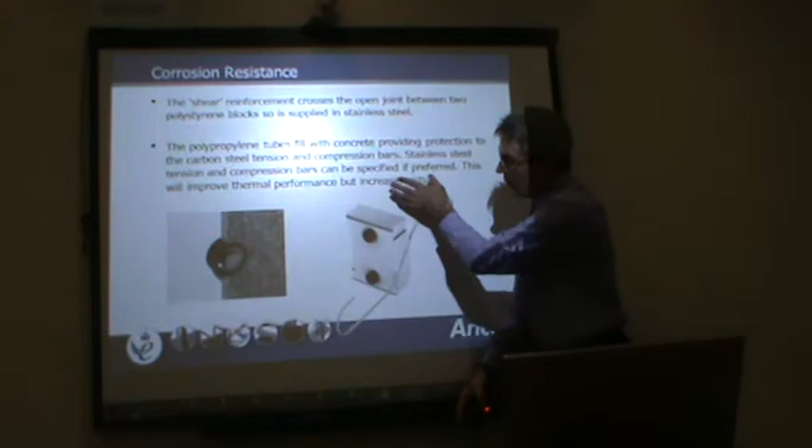With this system, you do have to put some bars through these tubes, because any moisture slopping about on top of the slab can get onto the bar and cause it to corrode. So we make this one in stainless steel, effectively pulling the balcony back up.

The bars that go through the top and bottom there are completely isolated from any moisture, because the tubes projecting into the concrete fill up with fines and block up, so you can use bog standard carbon steel reinforcement and make the whole thing a lot cheaper.

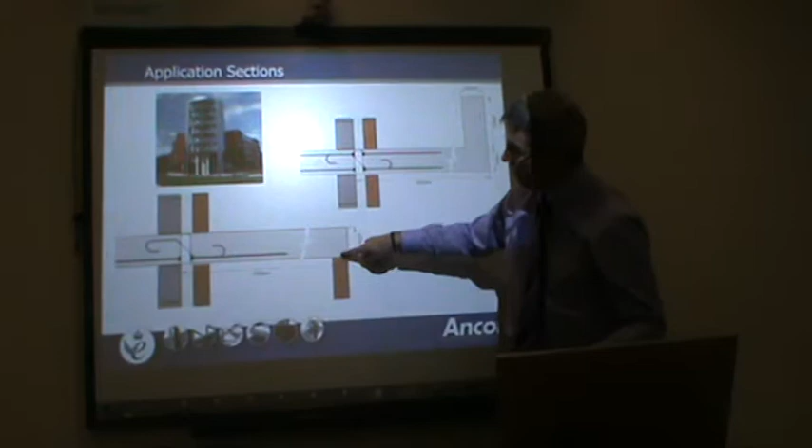You can also get rid of a bar at the top. If the balcony isn't cantilevered, it doesn't need a pull there and a push there. If it's sitting on a wall at the front, you can get rid of the bar going through the top and just have the bar through the bottom, to equalise the sloping load. So that's another advantage, and you can miss out the odd bar.

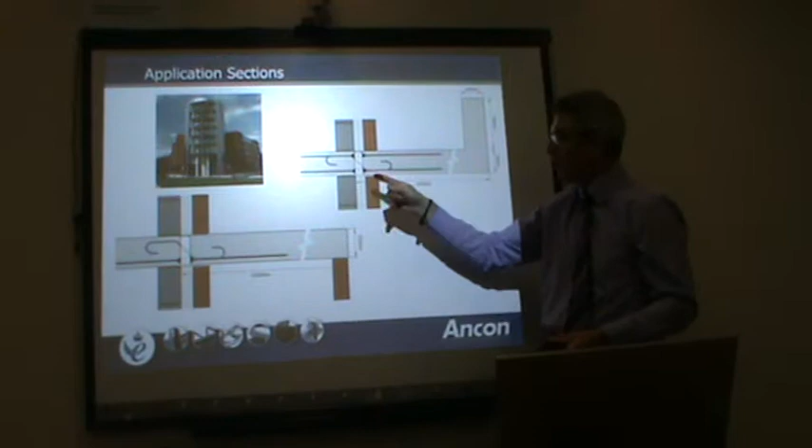If you've got a downpipe or a drain coming through your balcony, on the other type of system you can cut bars to go around it, but you don't know what effect that's having. With this system, you can miss a bar out and compensate by making the other bars a bigger diameter so they're a little bit stronger. So there are various advantages to this.

When I say it's more cost effective, I did a combined CPD seminar in Poole, in Dorset, for some consultant engineers called Calcinotto. This Julian Calcinotto was about 14 when he set up the business, and he was obviously a multi-millionaire. He sat in the seminar with his right-hand man, and afterwards he said, 'Oh, you're saying these are cheap? But I bet you still charge £15 a metre for them.'

His second-in-command, sat next to him, said, 'It won't be £15 a metre, it's a bit of polystyrene, it's going to be coppers.' I said, 'I'll find out for you.'

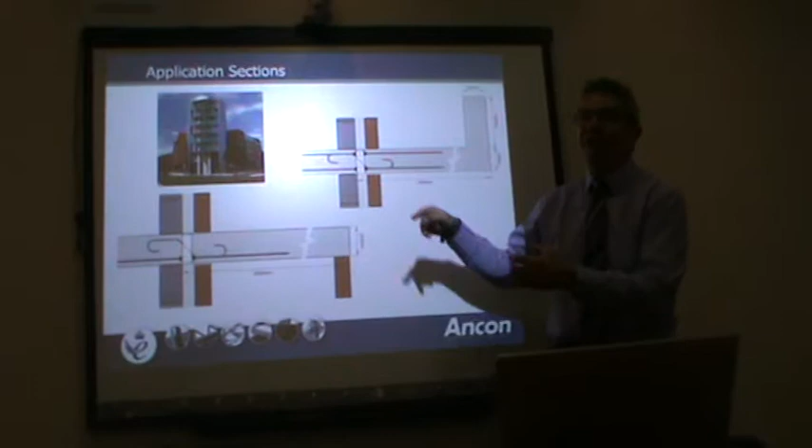So when I came out of the CPD session, I rang our office and asked for a price for a typical 200mm piece of Isotec thermal break with the reinforcing bars in and a bit of stainless steel rebar. They said £60 a metre. So I had to go back and say, 'You were right, it's not £15 a metre, it's £60 a metre, but the Schöck equivalent is £130 a metre.'

Relatively speaking, it's still quite a cheap item. I think these things are just an expensive thing to produce in any case. I don't usually talk about price, and Dan will probably give me a telling off on the way home for getting straight out of my area of knowledge.

And lastly, the very last thing I want to talk to you about, because you've all been very patient, is reinforcing against punching shear. Again, we're talking potentially about post-tension slabs, and certainly about flat slabs. When you've got flat, thin slabs attached to small columns at relatively wide centres, you can get a potential failure known as punching shear failure, which is basically the bed of nails principle.

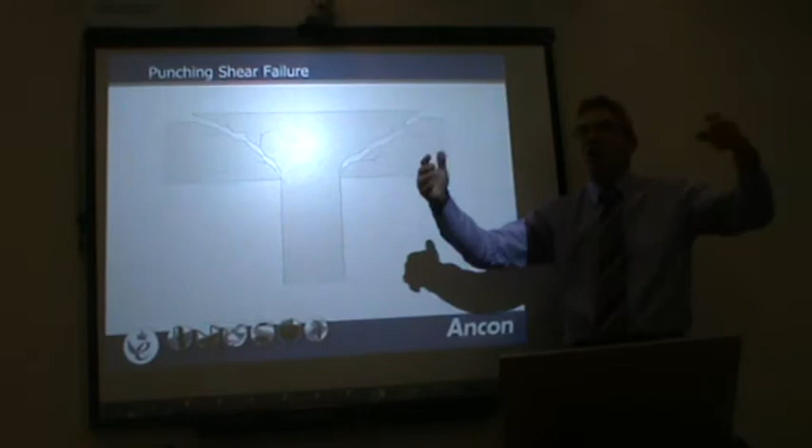If you blow up an airbed or a lilo, or whatever you call it over here—we call it a lilo in the northeast, the thing you swim around in on the beach—blow up one of those, lay it onto a bed of nails, and then lay on it, all the nails will pop through the plastic. It's exactly the same if you've got a thin slab equivalent to a piece of plastic, and small columns equivalent to nails: they will pop through the slab. It's basically because the slab is too thin, or it's not reinforced sufficiently, or the loads are too high to transfer the shear from the slab into the column. So you get the column pushing through the slab.

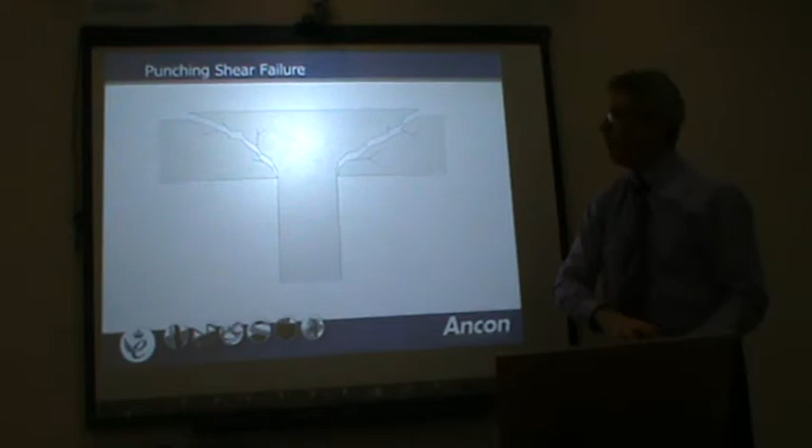Traditionally, to reinforce against that, you put links in. You put links between the top and bottom mats of reinforcement to stitch across this crack plane, and you space these out at the centres designated by the standard.

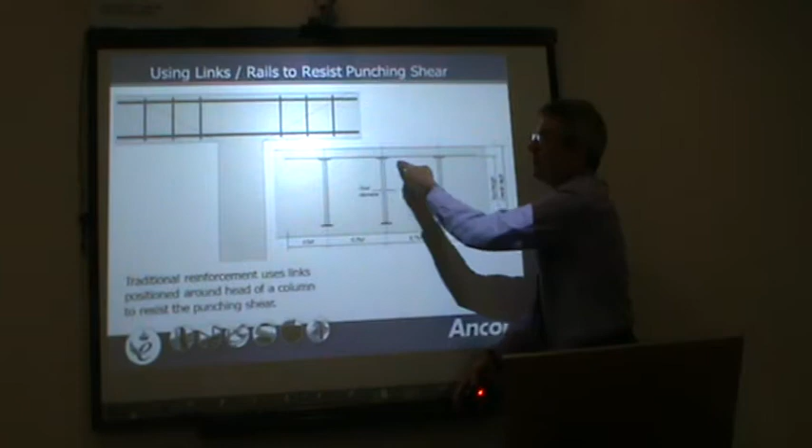To some extent, links like that have been replaced by stud rail systems, where rather than links you have a stud with a fattened end, each end at least 3 times the diameter of the stud, and these are simply spaced out on rails. They're designed in by computer program, by the architects and the engineers, or by us, by lads in our office who sit there all day designing these things. The advantage for your guys is that they're available in lots of different sizes, and they come just as a ladder, and they're simply dropped into the reinforcement cage.

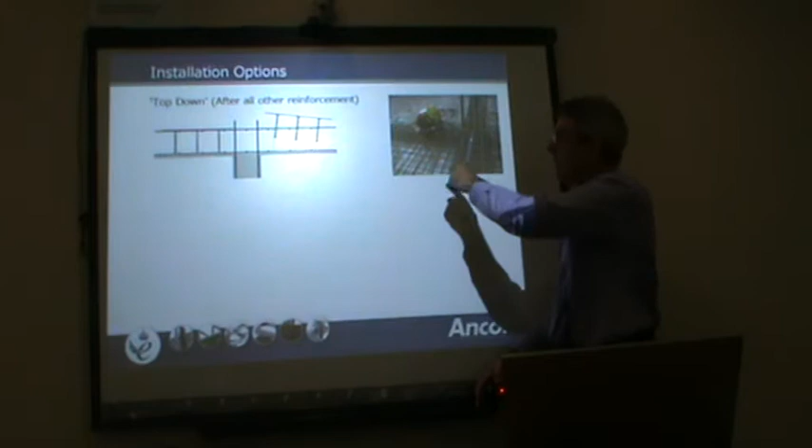So rather than having to make links around the top and bottom reinforcement, which might be quite sparse if it's a post-tension slab—there's likely to be very little reinforcement top and bottom—rather than having to make links which are wrapped down, you simply drop these things in around the head of the column, and they're very quick to install, and easy and quick for the engineer to inspect and make sure they've gone in correctly. You can fix them bottom up. The rail has a gap in the middle, so you can put nails down into the structure, but generally they're simply dropped into the top mat of reinforcement to save money that way.

As I said, they're designed in on a piece of software, which I'm not going to demonstrate, because if you demonstrate software, you need to be good at it. The lads who come in our office are fantastic, they look really slick. I'm rubbish at something like that—I'll be pressing Control-Alt-Delete and having to ring our IT department. So I'm not going to try and demonstrate it.

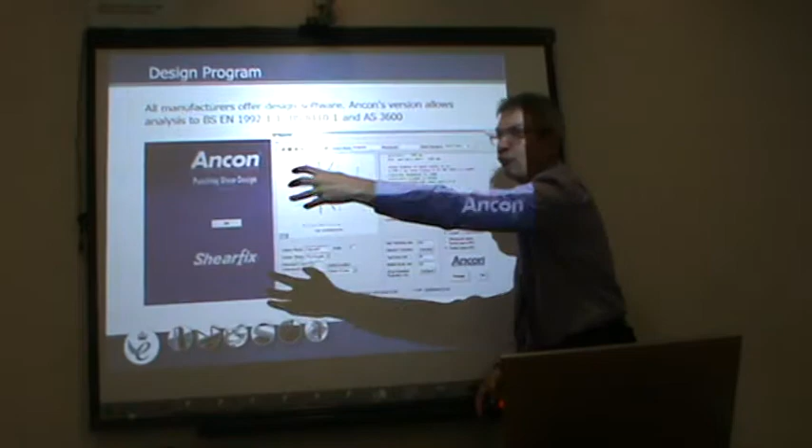But you put in, or the engineer puts in, all the things he would put in if he was designing the shear reinforcement by hand, and he gets a little drawing that you can drop onto a reinforcement drawing and send to you guys. If you've got links and you want us to convert them to these to get a price comparison, we can do that. If you send us in a drawing with all your links shown on it, we can transpose it to our punching shear reinforcement and do that for you.

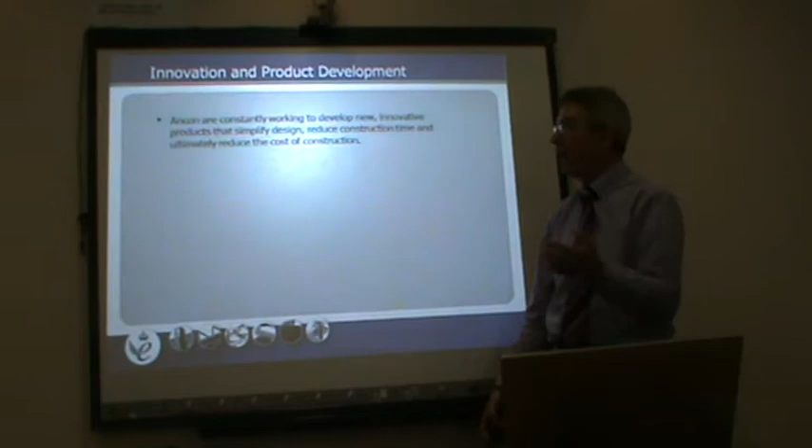Lastly, because I'm sure you guys are people who ask, we have what we call a new product development team. We all sit there on 60 grand a year, twiddling our thumbs and looking out the window, coming up with new products, like the lockable dowel I mentioned. Trouble is, a lot of the new products they come up with are rubbish, because they dream them up thinking everybody will want this, we send it out to market, and everybody says we don't want that, that's really rubbish.

No. But when you sell to a non-CARES approved company, CARES doesn't really follow through. Well, probably most of the companies we sell to are non-CARES approved, so maybe we just don't need to bother. No, but like, if I buy a sheet of mesh from BRC McMahon who are CARES approved, it's CARES approved, but if they sell it to builders providers and I buy that same sheet of mesh, it's not CARES approved anymore. Is that right? Or SIG or Longs, like say Long Construction or any of these distributors are not CARES approved, because CARES follows the product, not that. Yeah, I thought CARES - no, Neil, straighten that out. I don't think it does. I'm still not sure - CARES will say that it doesn't follow through. Chain of custody.

But what could these lads do to it to make it un-CARES approved? Well, CARES would say that they should be CARES approved. Oh right, yeah, that's it - I'm winning it. It's chain of custody, I'm sure. I'll look at that.